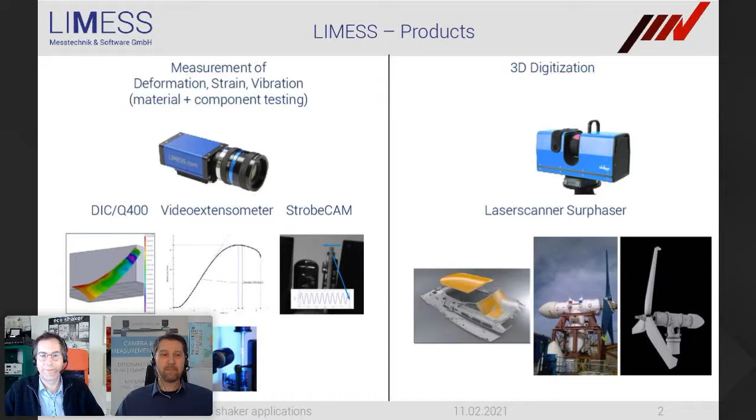Besides the systems that we are using for vibration testing, I have done a little bit of research and have come across a few more systems that are on the market. Let's have a brief overview of those technologies. I call them optical technologies because they're partly camera-based, partly with the human eye, partly with lasers. The most simple system that you probably all know is a strobe light. Strobe lights are manufactured by many companies in Germany and everywhere. I will explain the principle a little later; this is just for the overview.

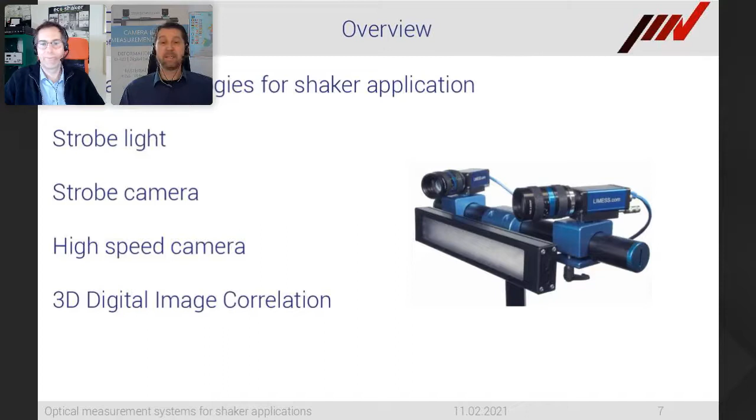I have also added Strobe Cam, which is a camera-based system for visualization of vibrations. I have added high-speed cameras; we know that some customers are using high-speed cameras for vibration measurement. And I have added 3D DIC, which is a very powerful and very accurate technology to measure deformations and displacements in 3D and also mode shapes. You'll learn about that later in detail.

And I have added laser vibrometers. It's also an optical technology, a laser interferometric technology, so it's very accurate. This is an overview that I have summarized for this presentation, and I hope that I cover almost all that is available on the market. So that's not only your products, but really we wanted to discuss technologies for shaker applications. So we are covering a wide range today, and we have a big audience today.

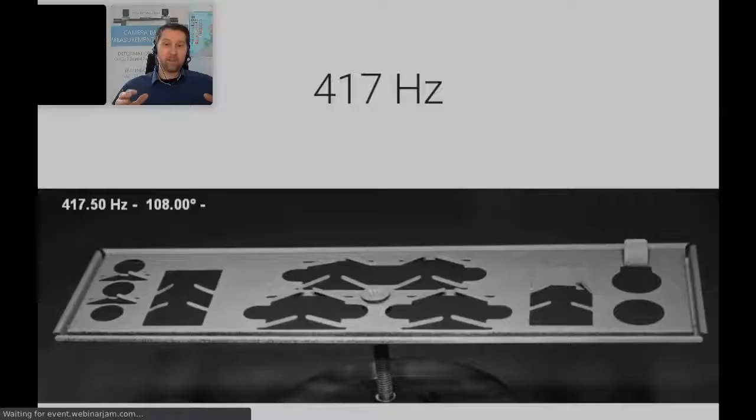So you see at different eigenfrequencies, the movement of the object is different. At higher frequencies, the tiny parts are moving; at smaller frequencies, there is a global movement of the object. That is what you should realize. And a camera system, a video stroboscope or a strobe cam system, is used for visualization. So it's very beautiful, it has a high quality, and you can directly see what parts of your object are

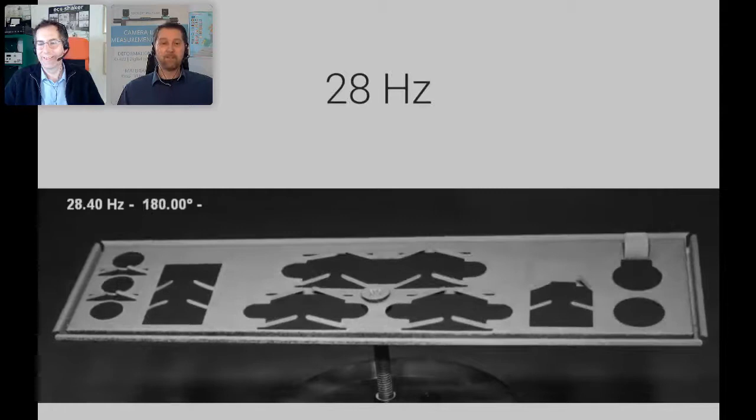moving. Of course, this is a very simple example. It's just a metal blade with different holes, but it has different eigenfrequencies. So it's a complex object in terms of shaker measurement. Sure. So I think this is understood. We can visualize movements with different frequencies.

And you have probably realized that independently of the eigenfrequency, the movement speed of the slow motion visualization is constant. This is what we can set up in such a system. Independent of whether an object moves with 1 kilohertz, 100 hertz or 10 hertz, the visualization has the same frequency, which makes it clearer for the human eye. Okay.

I think there is also a second video that I have added, because a nice thing here is that you can use this technology also for frequency sweeps. In the previous example, you have seen fixed frequencies, eigenfrequencies, and now you see a video that is recorded during a frequency sweep. The frequency started at about 20 hertz, and I can't remember up to what frequency it goes, but you see the frequency displayed in the top left corner of the video.

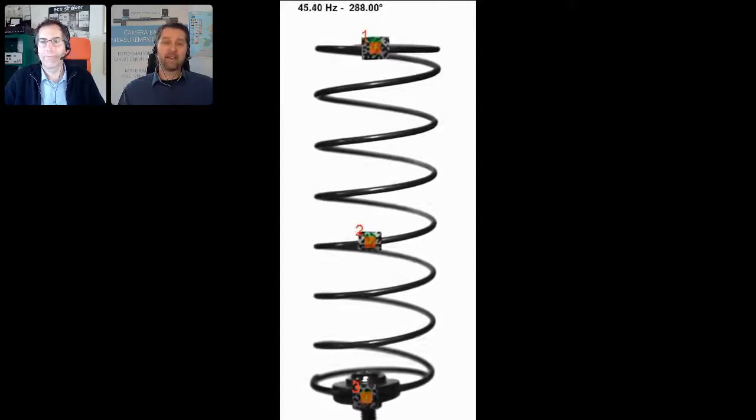And you see, depending on the frequency, this spring is moving in different directions and different eigenmodes are excited. So here, for example, there is an eigenfrequency at about 45 hertz. Now we have a lateral movement at a little bit higher frequency. And you see also some stickers, 1, 2, 3, on the video. Those stickers are very lightweight, so they don't influence the vibration of the object in this case. But we have applied those stickers to do some post-processing.

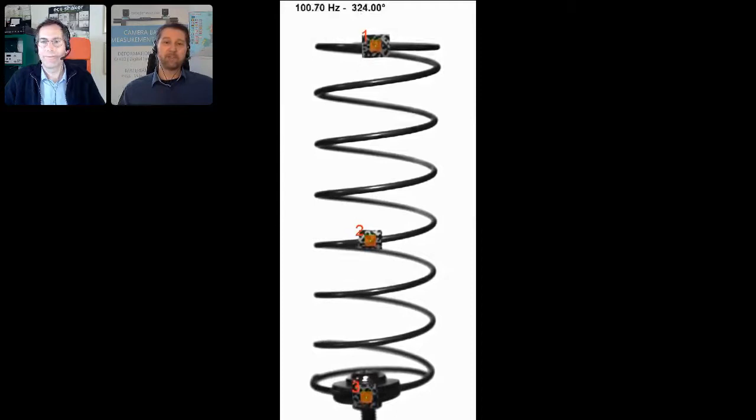We can do very accurate displacement measurements from those videos. And when this video is finished, we can show something like a resonance curve that shows the horizontal and the vertical displacement of the 3 dots. I think I just need to go to the next slide. Oh no, actually, I'm wrong in my counting. I'll explain how it works at a later stage. So this is a result of what we should see, and I will explain in detail how this technology works.

So now you get the visualization before the technology. And that's what the displacement measurement gave us. We have some horizontal movement, we have some vertical movement of the spring, we have the 3 dots tracked, and here you can see the different eigenfrequencies of the different directions.

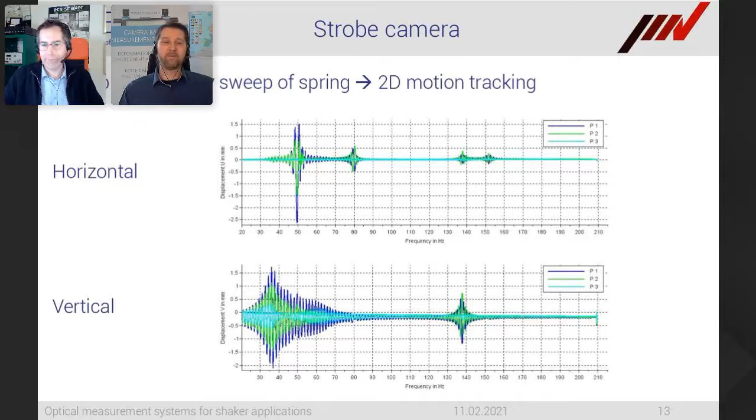I'm sorry for this jumping. So let's go back. Keeping us awake. Yes, let's go back to this slide.

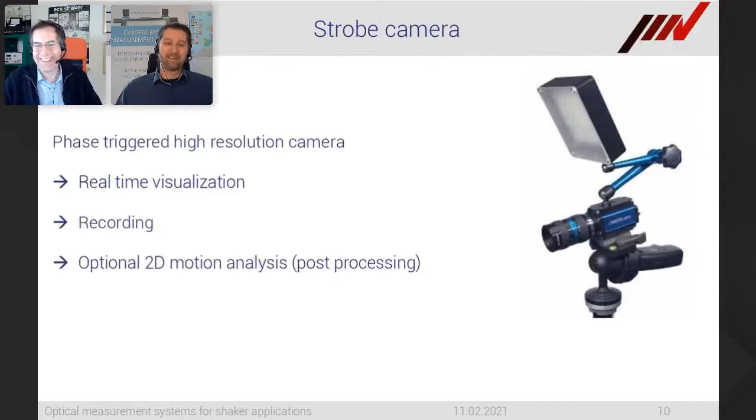And how does this work? It works by a very precise synchronization of the camera to the shaker signal, to the frequency controller or frequency generator output. Every frequency generator has a COLA signal output, which is proportional to the acceleration of the shaker. And we have developed an electronics.

It's a microcontroller unit that receives this COLA signal as an analog input signal and generates, very accurately and phase-related to this input signal, a trigger signal for the camera. And the camera records an image whenever it receives a trigger signal. How does this work in practice?

So for example, we have a sinusoidal COLA signal, and we want to record images at a specific fixed phase. So this technology allows us to set up a specific phase difference between the COLA signal and the camera. So which means... Where do I set up this phase difference?

Because a vibration controller is putting out the constant sine wave with a constant amplitude with the same frequency the shaker is driven. Yeah, so that's a phase. The COLA signal is analyzed with this microcontroller, and this microcontroller permanently measures the amplitude of the COLA signal, and it also measures the frequency of the COLA signal. So it knows exactly when is phase 0.

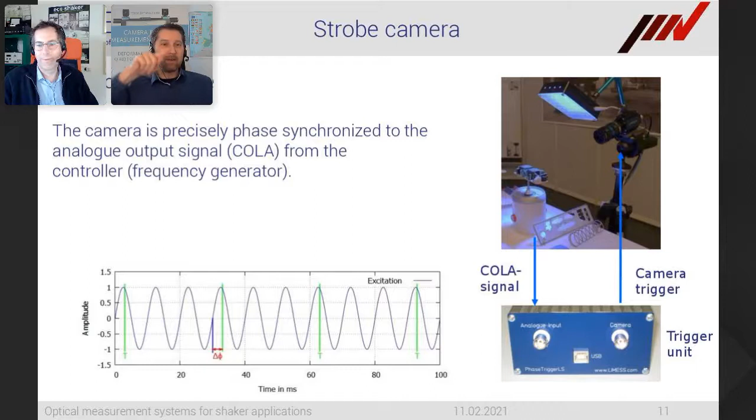So the secret in this StrobeCam is a very accurate phase synchronization, phase triggering to the related generator output signal. And with this, as you have seen already in the videos, it's possible to visualize movements on eigenfrequencies or even on a frequency sweep. And the system is optimized to produce small videos, which means if you have a frequency sweep of, let's say, 5 minutes, the system will record about 5 megabytes of image data, even with an HD camera with a 2 megapixel resolution, which is a very high resolution for this application and can give us a lot of interesting visualizations.

Yeah, so as you have already seen the videos that produce a strobe cam, we can continue with the next technologies that I have added in our overview. And this is a high-speed camera. A high-speed camera has in principle the advantage that it can record very fast images and image sequences. So it is also used like a strobe cam for recording and for visualization. And as with the strobe cam system, we can additionally add 2D or 3D motion analysis to get frequency diagrams.

The big difference to the strobe cam is that those cameras can be used also for non-periodic events. And typically high-speed cameras are used for crash tests, for drop tests, for impact testing, or for shock tests. And only with a high-speed camera, you can visualize a shock test on a shaker. As if I knew that you were going to say that. We have prepared a video. Yes, and this video I also wanted to show after the technical explanation, but it's fine to see it here as well.

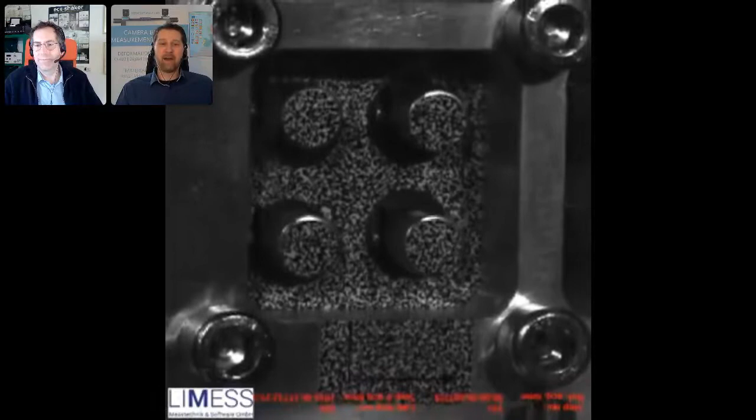So this is a kind of shock test or a drop test. So it's a PCB board that impacts, and you see that the capacitors on the PCB board are beginning to shake. And of course, this is now a visual representation of what the high-speed camera has recorded. If we go back to the presentation and jump over this slide, we will see here the result of the motion analysis. We get the displacement, velocities and accelerations of the PCB board and of the single capacitors, also in different directions. So it provides quantitative measurements on something like a shock test.

But how is this technically possible? So jumping back, the secret of a high-speed camera is that it is using a very optimized CMOS sensor. It has an integrated computer, CPU, something like that, and an integrated memory. So the transfer from the camera sensor to the memory is very short. It's a very dedicated interface where the sensor is read out in parallel, so it is possible to achieve very high data bandwidths from the sensor to the memory. After the test is done, you will need to read out these images over a dedicated interface like gigabit Ethernet or 10 GigE. But the initial storage is happening in the memory of the high-speed camera.

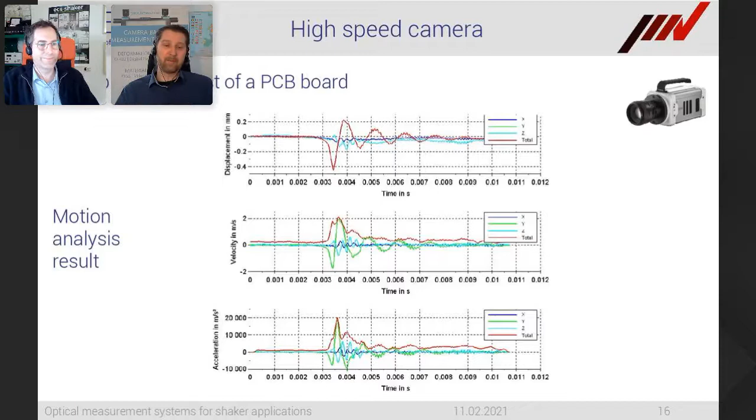But whenever you use one camera, you are always limited to a measurement in the plane. So you cannot measure out of plane. It's not a 3D measurement. And this is where the 3D stereo camera systems are improving the information much more, because we are using here 2 cameras, and this is a triangulation principle between the 2 camera views, based on DIC or based on photogrammetry.

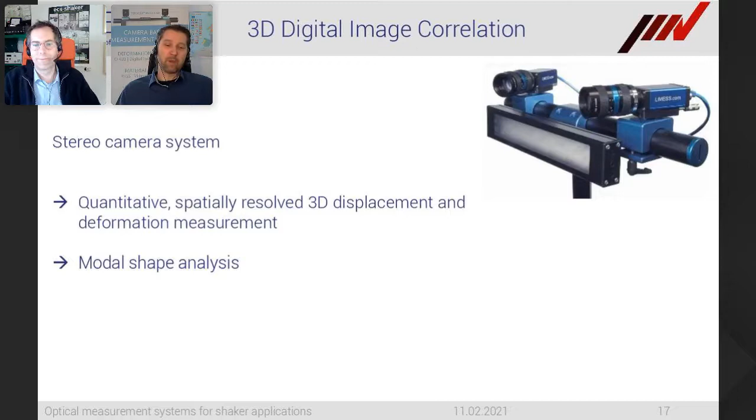And these measurement systems provide a spatially resolved 3D displacement and deformation measurement. So it's providing 3D coordinate information, 3D displacement information, and also strain. And it's a very nice technique, for example, to measure mode shapes on objects. And I have one slide to show very briefly how this technology works.

So it's based on, let's say, pattern tracking technology. So we need to have a random pattern on the object surface. And if we don't have a natural pattern on the surface, we could use a sticker or we could use a spray paint to produce a certain pattern on the object. And this pattern tracking technology or digital image correlation technology is capable to measure the motion and the deformation of the pattern inside a small, let's say, correlation window or subset. So the image is divided by the DIC software in small subsets, and the pattern inside every subset is giving, in this case, a 2D displacement and deformation value.

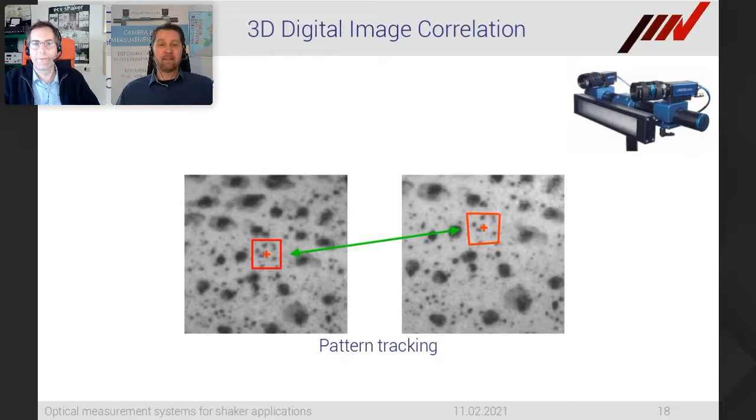And this technology nowadays is done typically with 2 cameras. And if we are using 2 cameras, we talk about stereo correlation. Which means the left camera records the object from a slightly different viewpoint than the right camera. And every surface point or its small surrounding is stereo correlated between the left and the right camera. And this technique allows to get as a first state the shape, the 3D coordinates of every surface point of the object. And this stereo correlation is done for all images in our image sequence.

Which means for every image state, we get a 3D coordinate, and relating the reference coordinates of the surface to the deformed or moved coordinates of the surface, we get the 3D displacement, the 3D deformation, and the surface strain. And the major advantage here is that it is very accurate. So we get micrometer resolution. Typically, we say, as a rule of thumb, such a technology can resolve a 100,000th of the field of view width, which means if we have a 100 millimeter field of view, a 100,000th of 100 millimeters is 1 micrometer. So it's a very sensitive technique.

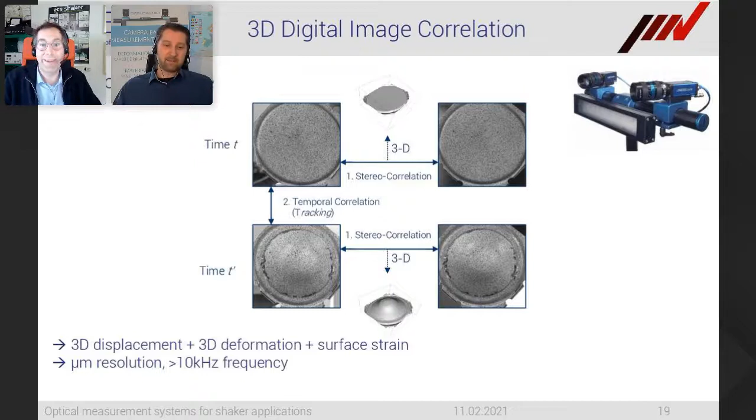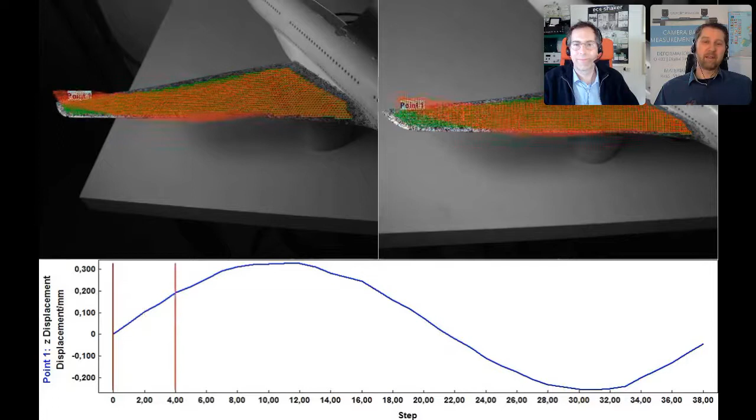So that video shows an aircraft model which is mounted on a very tiny shaker. I think it's a 10 Newton shaker. And the video that you see is a live video of the wing. And as an overlay on this live video, you see the red grid displays the 3D displacement of the wing. And the amplitude is so tiny that we cannot see any movement in the camera.

And the grid is amplified by a factor of 50 to see the movement. And at the corner of the wing, you see a point, and in the bottom diagram, you see the Z displacement of this point quantitatively measured. And this is a measurement with a static high resolution 2 megapixel camera at an eigenfrequency of, I think it was 33 Hertz. So this wing has its first eigenfrequency at 33 Hertz, and our 10 Newton shaker can get a movement amplitude of 0.3 millimeters.

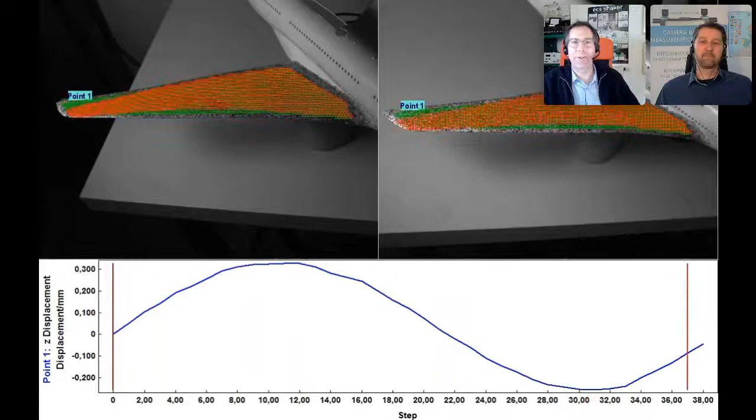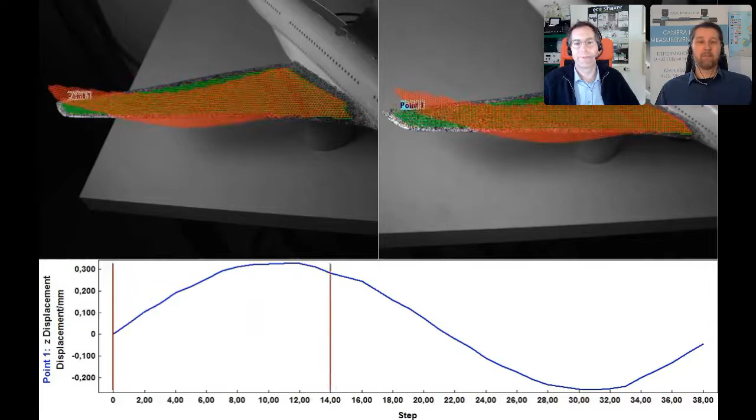So yeah, I think that is an interesting thing, because when you say that you are usually testing aircraft, you can imagine that the wing of the aircraft really is moving. But as you just said, with the eyes there's no movement to be detected, but only in the post-processing you can find those modes. Is that correct? Yeah, exactly. So the post-processing increases sensitivity roughly by a factor of 100. And the visual movement is below 1 pixel, so you cannot see it, but you can measure it. Yeah, nice.

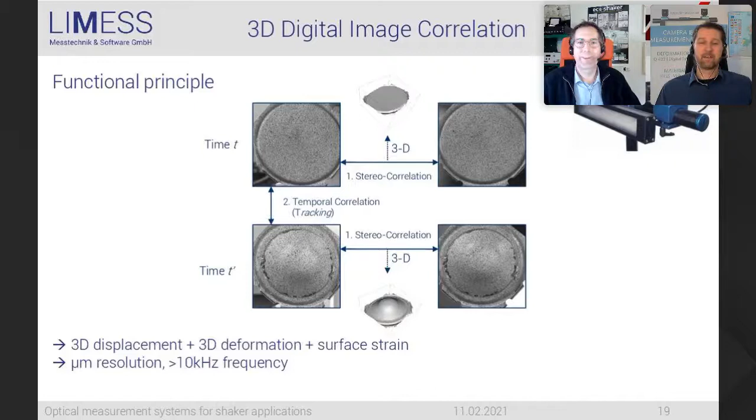Back to the presentation. Yeah, back to the presentation. What else do we have here?

So a second example, and this is a PCB board. You see the speckle pattern. We call the random pattern on the surface speckle pattern, which is sprayed on the PCB board with some electronic components, with a connector, with some integrated circuits. And if you imagine that you want to accelerate this PCB board with a pink noise, it is not possible to use a strobe light. It is not possible to use a strobe cam, because both of them need a single frequency.

And it's also not possible to use DIC with a phase trigger unit, because this is also limited to eigenfrequency data. But if you use two high-speed cameras, as you see on the stereo bar in the top right corner of the slide, it is possible to use DIC technology on pink noise stimulation on any specimen. And here is an example where we have applied a pink noise on this electronic board. The measurement rate of the camera was 2 kilohertz. And for this, we also have a video that you please show, Martin.

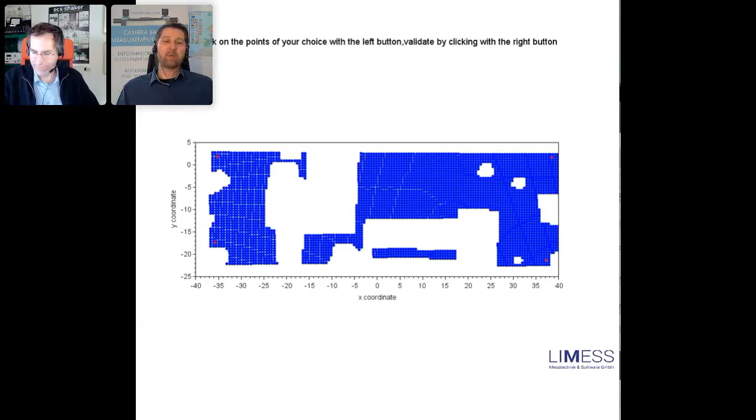So it's mode shape analysis. Q400 is our product name, 3D DIC. And when the video is running, you see our PCB board, all the grid points that are measured. We need to select a couple of points where we expect some movement. In this case, we have selected 4 points. So what you see is the Z displacement of the 4 points in time domain. And if we do a Fourier transformation, we get the frequency responses. And here we can select some eigenfrequencies that are interesting for us. So the red point has eigenfrequencies at different frequencies.

And if we do some mode shape analysis here, we see the movement of different eigenmodes of this PCB board. So you see at the top of the slides, the frequencies are changing, and I have just added the analysis of all different eigenfrequencies to this video.

Maybe you want to run it again because it's so beautiful. I think it's beautiful. I hope you like it as well. Let me restart it.

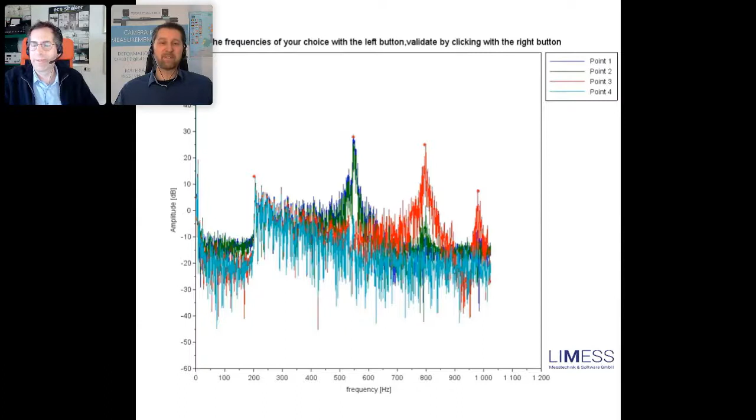So I have just added some results to one video, which is more efficient than starting 5 videos. So this is the time response, the frequency response. So different points have different eigenfrequencies. We have selected 4 different frequencies. If we then do a mode shape analysis, we get these different eigenmodes.

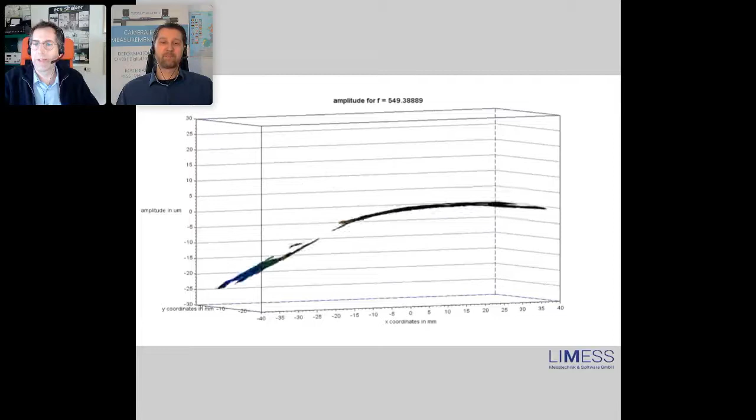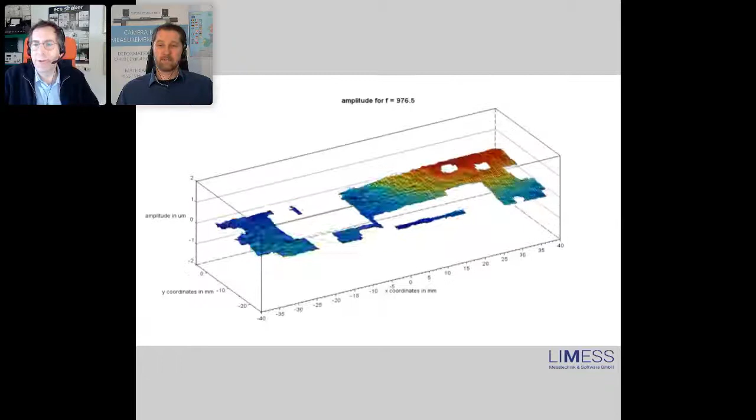Okay. And mode shapes. Yeah, I started a poll some time ago asking our audience, do you know the Nyquist frequency? And you said you have been using a random test up to 2 kilohertz. So what does that have to do with the Nyquist frequency and the results we are seeing here?

Yes, there is a relation. And I'm happy that we have 37% not knowing what is Nyquist frequency. So there is a Nyquist theorem, and it says that you need to measure with a 2.5 times higher frequency than you want to resolve as a vibration.

Example, if you want to measure up to 1 kilohertz movement, you need to record with a high-speed camera faster than 2.5 kilohertz. So factor 2.5, which means the Nyquist frequency, I think the Nyquist frequency is a frequency that you can maximum detect using a specific recording rate of the camera.

This means, in my last sentences, if you are using 2 kilohertz measurement rate, you are getting close to 1 kilohertz vibration sensitivity, maybe 0.8. I cannot calculate 2 divided by 2.5 with my brain. I would need to use a calculator for that.

But thanks for the responses. I hope that this is now more clear. So we need always to be faster with the cameras than the maximum frequency we want to resolve with our measurement. Okay.

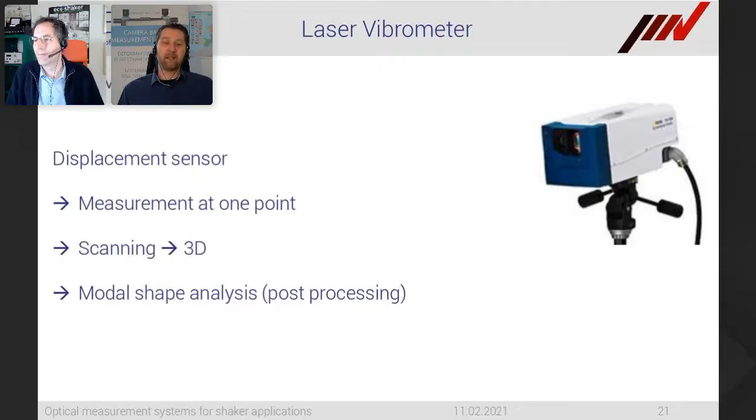How does this work? I don't want to answer this in detail. So a laser vibrometer is based on laser Doppler vibrometry. This technology uses a laser, and so on. And laser Doppler vibrometry means that when the object moves in direction of the laser vibrometer, the frequency of the laser changes. It gets larger or smaller, I don't know. But it changes in the other direction than if the object would move away.

So the movement speed is related to the frequencies that the detector in the laser vibrometer is detecting. And from that, it's possible to measure displacements, displacement speeds, and also amplitudes, of course, by integrating this. And by using multiple laser vibrometers, you get also 3D information from that.

The great thing in laser vibrometers is that those systems are very accurate and can go up to very high frequencies. And maybe it's a little bit an overshoot on testing on electrodynamic shakers, where we are talking about a few kilohertz. This technique can go up to megahertz, which is 1,000 times faster than required on electrodynamic shakers.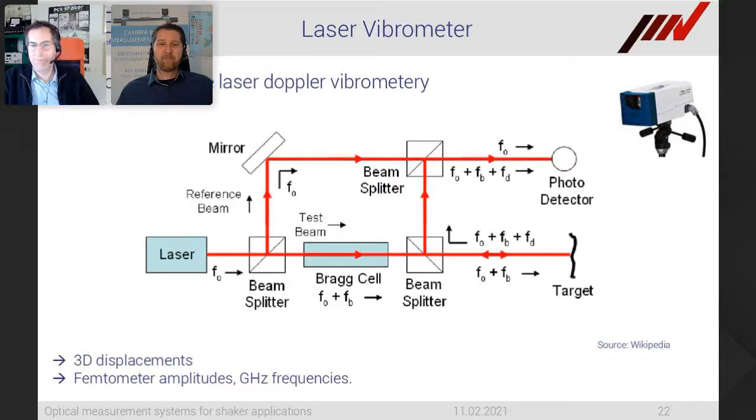Very nice. Do I have an example? I have a slide with examples. I don't have a video anymore. We have here a shaker. Actually, I have only found one example on YouTube where somebody has used a shaker to measure the eigenmodes of this beam. And of course, this looks like a very stiff beam, so the amplitudes will be very tiny.

I don't know exactly what the frequencies were here, but you see the result of the laser vibrometer can be used, for example, to distinguish different modes. On the left image in the bottom, you see the first eigenmode. On the second image, you see the second eigenmode. And it can resolve really very tiny displacements.

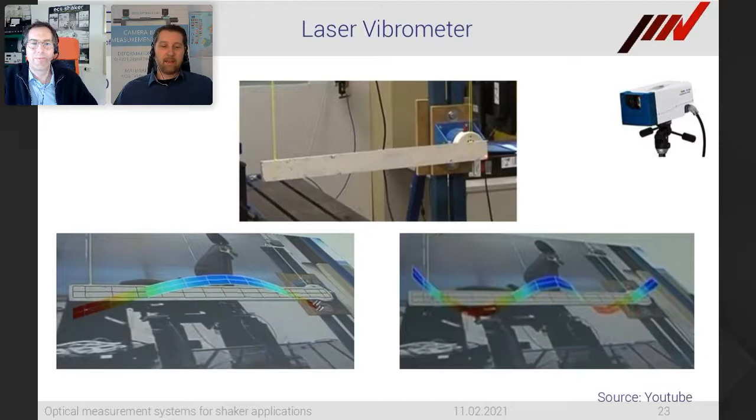Nice overview. So I think we've seen the different technologies available for optical measurements, different setups. So we started with the handheld stroboscopes, been going through different options. So could you summarize the requirements generally? Yes. Actually, I have a slide to sum up the requirements.

And all these techniques are optical techniques. All these techniques require that you have optical access. So you cannot look behind an object. Otherwise, you need to stand behind the object. So you need to place your strobe light and the human eye to have optical access. The same is for the strobe cam, for a high-speed camera, DIC with high-speed camera, and the vibrometer. They all need optical access.

DIC with high-speed camera handles random excitation, right? Exactly. This is why I added it to this table, because we get different information, or we can use it on different applications. That's better to say. And on a strobe light, we in addition need to know the shaker frequency, or we need to find it by tuning the frequency of the strobe light.

So this can be time consuming to find it if you have no idea about what is happening. But typically when you use a frequency generator together with an electrodynamic shaker, you know with which frequency you run your test. So you need to input the shaker frequency on the strobe light. The same works with the strobe cam. So either you manually enter the shaker frequency, or you use this microcontroller unit that reads the COLA signal from the generator and is automatically doing the frequency sweep and so on.

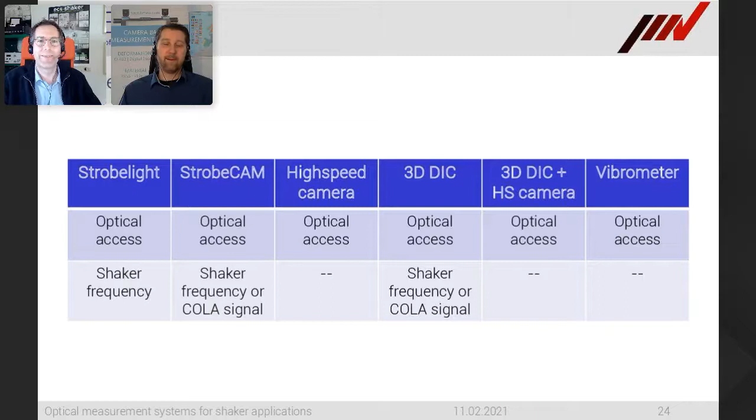It depends what you want to do with the system. A strobe light, you cannot really calibrate. Of course, you could calibrate the time base. If you want to use a strobe light to measure the frequency of something, then the time base must be calibrated. I have missed to write this in the table. On a strobe cam, you don't need to calibrate it because it's used for visualization. But when you start to do post-processing and want to get quantitative displacements, you could use a simple calibration technique with, let's say, a ruler to get the measures in millimeter, and you can certify those calibration plates, so you get a DAkkS certificate if you want. So only for visualization you don't need to calibrate this technique.

Also with a high-speed camera, if you want to do post-processing, measure displacement, you need to do some scale calibration for it. And of course, a high-speed camera has its own calibration in terms of time base. So for every high-speed camera, you get a certification about the accuracy of the time base.

3D DIC, as we are using two cameras, the setup is very flexible. You can use it for small and large objects. You need to calibrate it with a checkerboard plate, and for this checkerboard plate we can also get a DAkkS certificate. So this is a proven way to do it. And a major advantage of our DIC system is also that we get the standard deviations for all displacements and coordinate values. So we are always sure how good the measurement is. The same is for DIC and high-speed camera. So it works the same like DIC with static cameras.

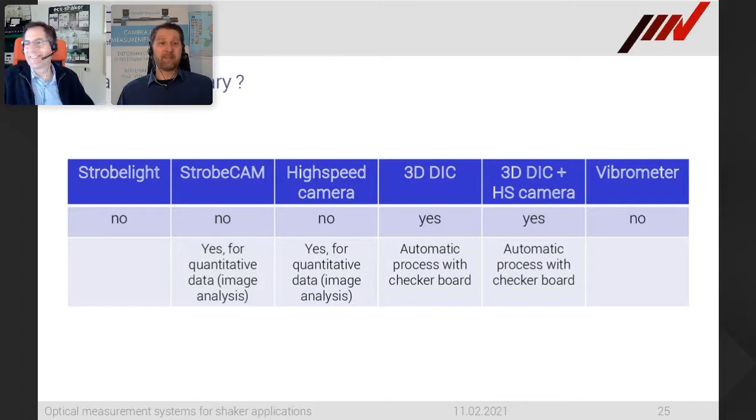And the vibrometer, I'm not an expert on vibrometers. I'm sure that they are somehow calibrated in terms of frequency, whatever. But probably we as an end user will never calibrate it. It must be a calibration during the manufacturing.

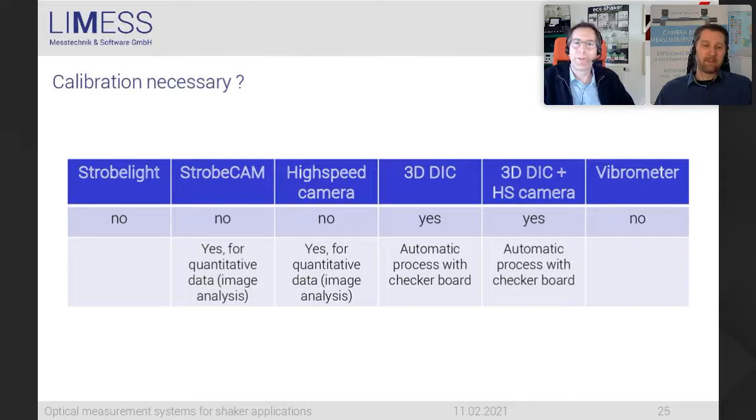Very good. The limitations and maybe a wrap-up summary from you about the technologies, maybe some ballpark figures. Put a slide together with that. What are our technical limitations and practical limitations? So I have added in this table only the key points that I see. So for a strobe light, it works only for a visible motion amplitude. If the amplitude is too small to be seen with a human eye or with, let's say, a loupe. I don't know what is the English word of loupe.

Maybe there are enough people to understand German.

So a strobe light can only visualize large enough movements. It's the same with the strobe cam. The motion must be larger than a pixel, let's say, to be seen. Unless you do post-processing, then you can increase the sensitivity by a factor of 100. The same is valid for high-speed camera, for DIC, with high-speed camera or with static camera.

The practical limitation I have already told about is the Nyquist frequency, which is important if you use high-speed cameras together with DIC, and probably there are also some limitations on the vibrometer, but I would guess that it's anyway not really dedicated for electrodynamic shakers because it's too sensitive. It will not measure large deformations, as far as I have understood from this technology.

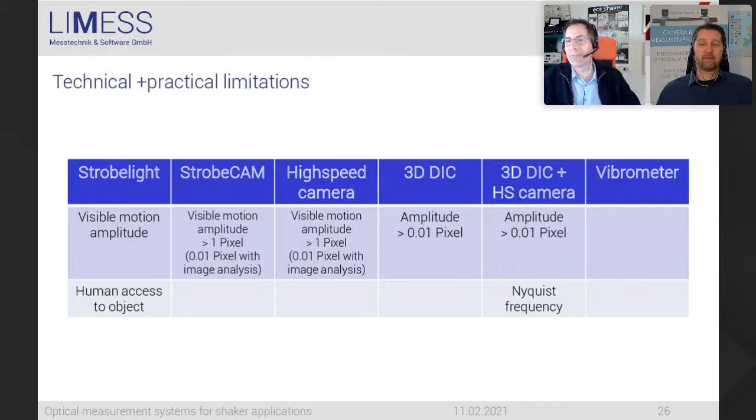And your summary about technologies? Is it possible to just summarize? Last minute summary. So last slide.

One slide. Strobe light is probably the lowest cost solution, unless you want to go to very high frequencies and unless you might need a lot of lights; that is also used for rotation events. A strobe cam is very nice for visualization, but also provides videos, so you can easily use it for reporting. You can send a video to your customer: hey, listen, it's moving at this frequency. Here you can see it in detail. You need to improve whatever.

High-speed camera, typically only necessary to use for shock tests. 3D DIC is a quantitative technique, so it's probably the most accurate technology if we don't think about the vibrometer. It provides a lot of information. It's a full field information technology. We use it for modal analysis, and in combination with a high-speed camera, we can even use a DIC system for impact testing, for white, pink noise, and so on. So it can go to more dynamic singular events.

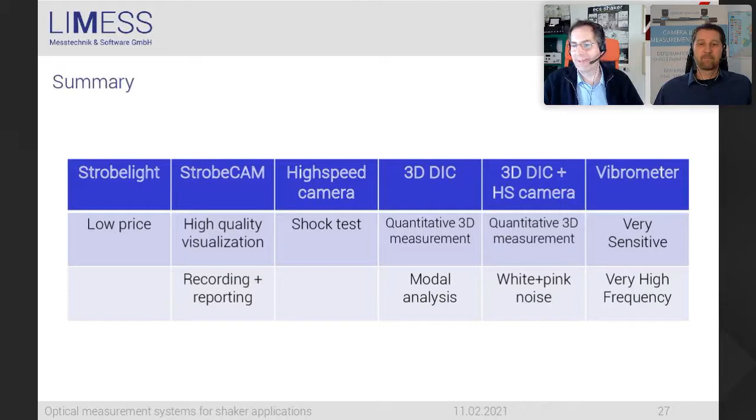And vibrometer, my summary is it's very sensitive and can go up to very high frequency. It's also very, very expensive. So probably for a 3D laser vibrometer for 3-axis, you need to spend more than 200,000 euros, maybe even more. So, yes. Thank you very much. I think that's the end of the presentation.

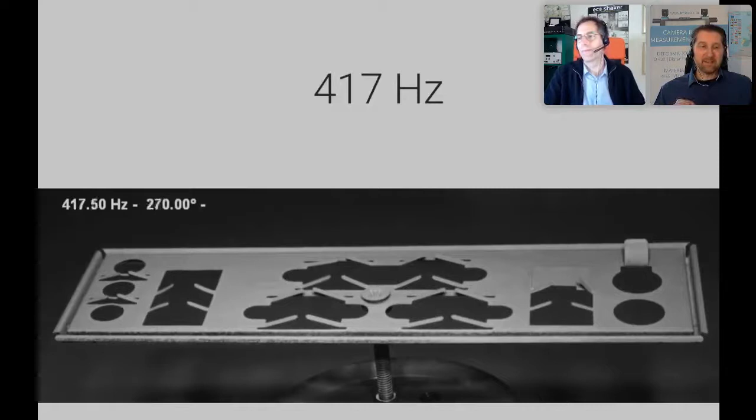And the interesting thing is, I have not talked about that, but we can use nowadays a high resolution camera, let's say 5 or 12 megapixel camera, to measure a mode shape at 1 kilohertz. So the camera records only 10 hertz because a high resolution camera is very slow in its frame rate. So we can use a slow, high resolution camera for high frequency because the trigger is so accurate.

It works, of course, only when the sinus is a sinus for some fractions of seconds. So the image system needs always to record a few images to digitize your sinus. But with this, it's possible to resolve very tiny displacements by using high resolution cameras. It provides a lot of image quality. So with the Strobe Cam system, you can forget this Nyquist theorem because the trigger unit is much higher resolution in terms of phase synchronization accuracy than a high-speed camera can do.

Nice. Thank you. Just looking back to the beginning when you founded LIMESS in 1998, now almost 23 years later, from a technical point of view, what is the biggest change, the biggest development in the technology? Actually, it's both. It's both hardware and software.